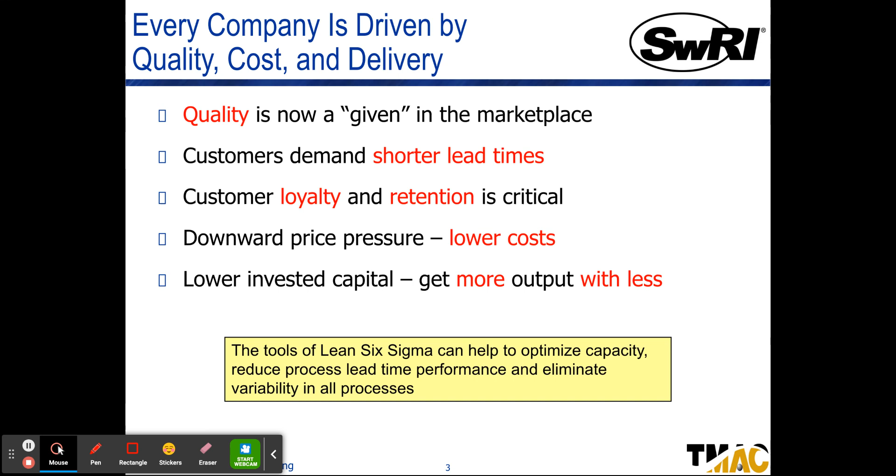Every company is driven by quality, cost, and delivery. Quality is a given in the marketplace now. If you order from Amazon, you want that item now, ASAP. Customers demand shorter lead times. Customer loyalty and retention is critical, so you want to keep your customers, otherwise they'll go somewhere else where they can get it quicker, faster, cheaper. That also talks about the price pressure of lowering costs, and then lower invested capital—you're getting more output with less. That's kind of what we're going to go through today.

What is lean? The definition of lean is a systematic approach to identifying and eliminating waste, non-value-added activities, through continuous improvement by flowing the product at the pull of the customer in pursuit of perfection. We're going to walk through that.

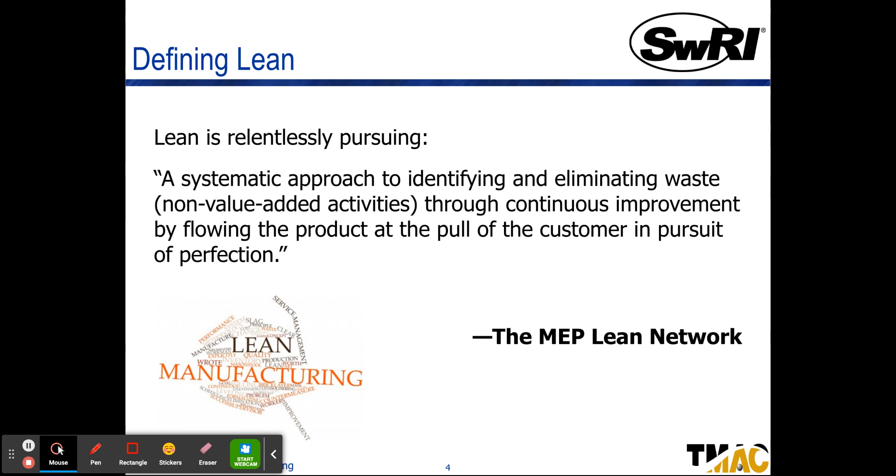So the activity that you missed today, we're just going to walk through it and talk about it since you can't do it. Basically, we are going to do a short version of what they would walk through in an orientation of a company to try and make their process more lean.

So we're going to pretend that you're hired. This is your orientation, you're getting started on your training, and we're going to be Modular Aerospace Enterprises. Welcome aboard—you are all new hires.

A little bit of background: this company was started 30 years ago by two Air Force vets. The company makes small jets and planes from modular components, where increasing customer demand is currently causing many problems. Current management is very traditional, old school in their thinking.

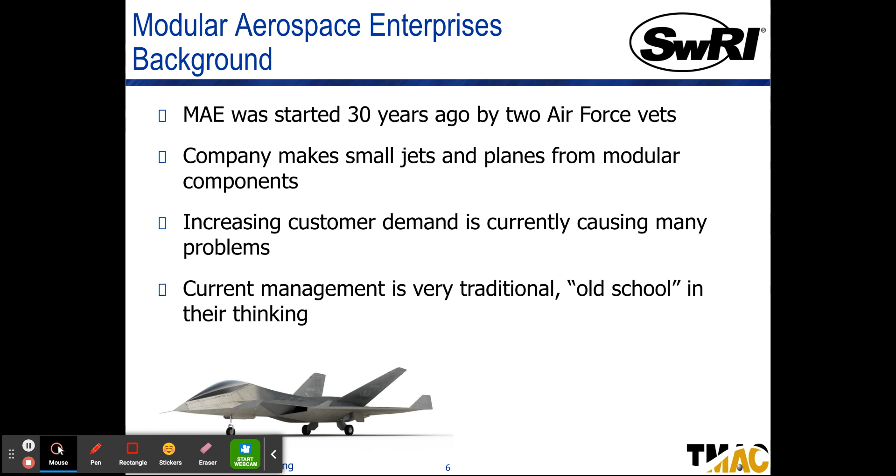All of our shifts are 7 minutes in length, and we're going to work in batches of 5 planes, so you have to have 5 planes before you can move it to the next station. You must always keep busy, but you cannot help each other, because if you help somebody at their station, you'll get behind in your own. So we want to make sure everybody stays in their own station. If for some reason you end up with a plane part and you're not sure what happened, or it's not set up the way it's supposed to be, you flip it upside down, because we're not trained to rework that. And know the boss is always right.

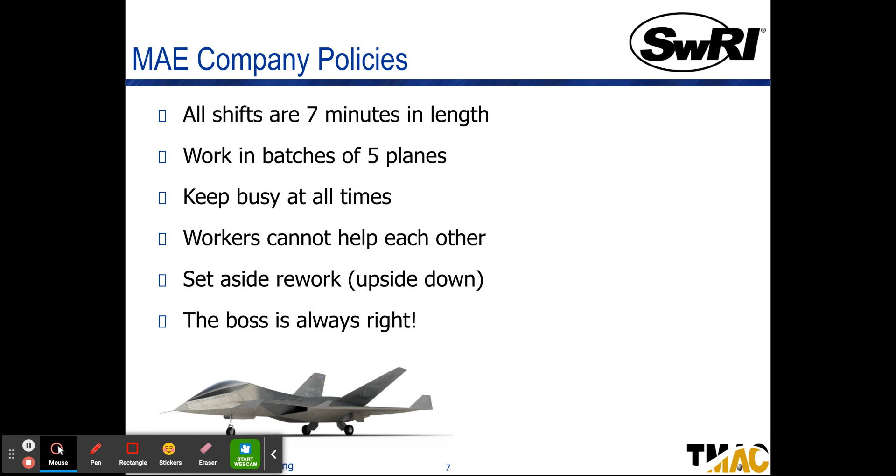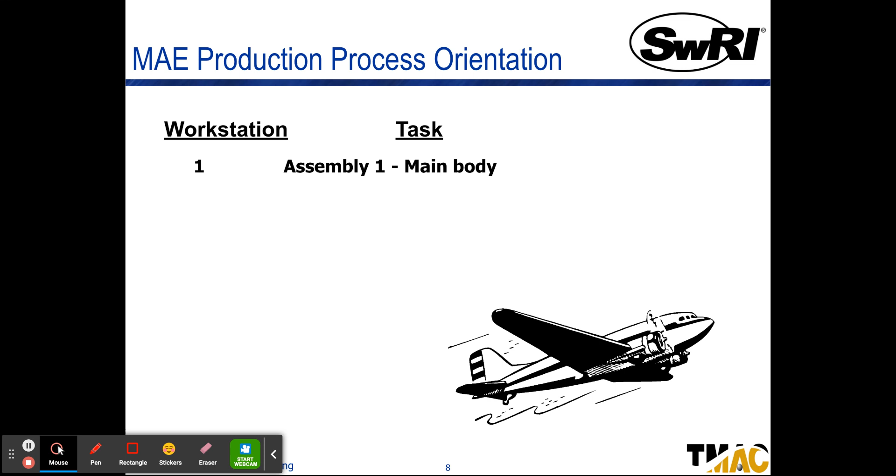In this activity, we had everybody in class work a different workstation. Station 1 was in charge of the main body of the plane. Station 2 added the wings. Station 3 added the tail. Station 4 added the cockpit and wheels. And Station 5 was our final inspection and quality control, making sure the plane was correctly put together.

We had some raw material handlers who would come from the warehouse and bring the materials you needed for your station. And then we had a plane material handler—our forklift operators—who could only bring 5 parts from each station. So when 5 main bodies were done at workstation 1, they would bring those 5 to station 2.

So round 1, we are going to do this traditional manufacturing style. Remember the rules: all shifts are 7 minutes in length, we work in batches of 5 planes, so you cannot ask your forklift driver to move your planes until you have 5. You must keep busy at all times, workers cannot help each other, and again, if something's wrong, you need to put your plane upside down because you're not qualified to fix it.

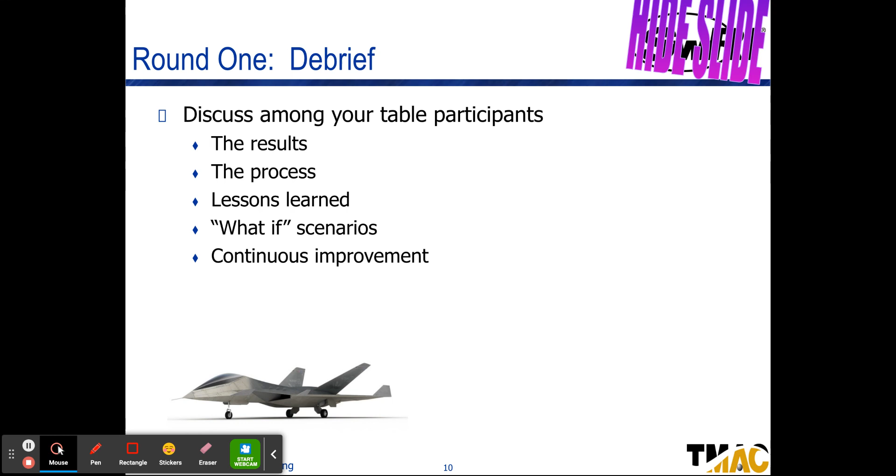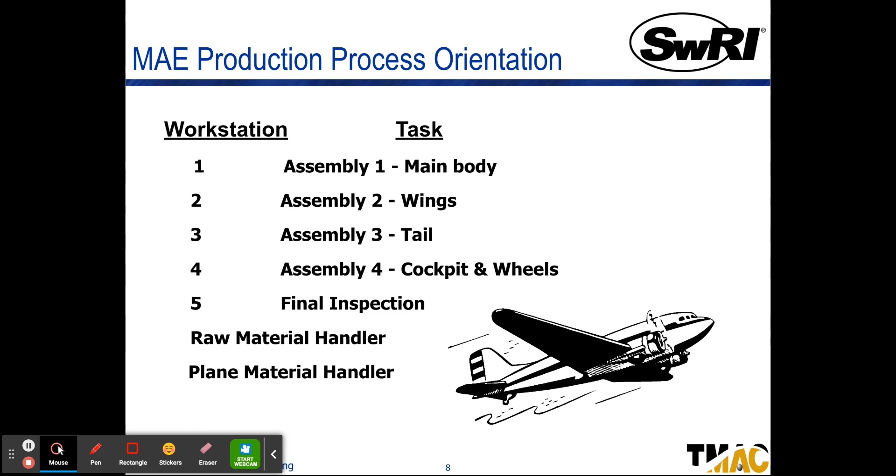When this happened, we saw a lot of lost time. So let's debrief a little bit about what happened.

So when this happened, the process just wasn't as great as we wanted it to be. The fact that we had to wait for batches of 5 took... Station 1 was pretty quick because they only had 2 pieces to put on their plane. But when it got to Station 2 and 3, there was a lot of wasted time. And so Station 4 and 5 were waiting forever to get that first batch. So batches is not really working out for us in this company.

And so we want to kind of come up with a better idea. And that's why we're hiring Southwest Research Institute to see if we can come up with a better way to do this. Our layout also wasn't fantastic.

Our layout, we had all of Station 1 in one section, all of Station 2 in another. And so we had to have the forklift driver going back and forth quite a bit. And then the materials themselves were in the warehouse, so the material handler had to go back and forth as well quite a bit. So the layout of our production line was just not very good.

And so in general, there was just way too much work that was in process. So we had a lot of work in process. And so what happened is after those 7 minutes, we did not meet our goal of 30 planes. In fact, we only really had about 5 at the end, okay? And so our customer is very upset because we did not hit those 30 planes.

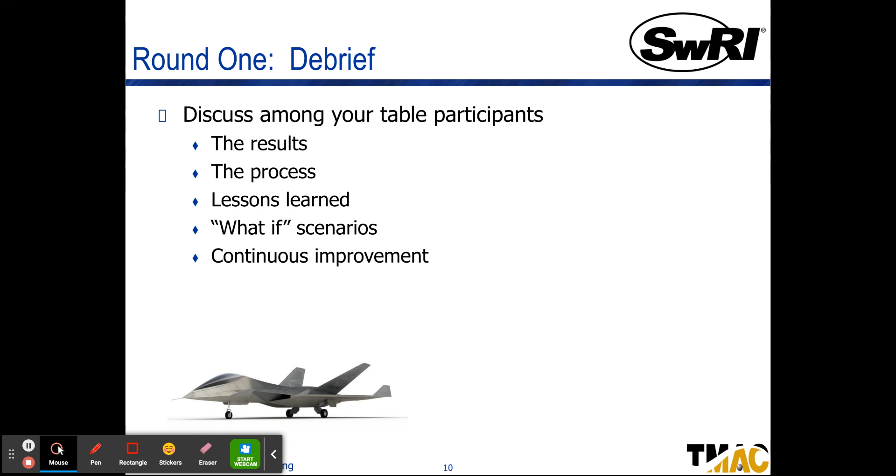So let's talk about why Southwest Research Institute can help us. So we want to have value added. These are the next steps. We want steps essential to deliver the product or service according to the customer. So the customer cares what the customer is willing to pay for, right? So if there's value being added to the plane, then of course the customer wants to pay for that.

They do not want to pay for that extra time wasted, the non-value added. So the steps that didn't generate any value from the customer's perspective, they don't want to pay for that. And so we're paying these employees extra, but there is a lot of non-value added time between transportation and materials, and this can be eliminated or reduced without impairing our process. And so we want to look at the process and see how we can better it.

So we have non-value added but necessary. There are some steps that are non-value added, but we do require them. So we need to make sure that we do have safety and regulations, and we also need to make sure we have quality control inspecting all the planes. In general, we need our non-valued items added unless a strong case can be made. Otherwise, we need to show that it is value added to our customer.

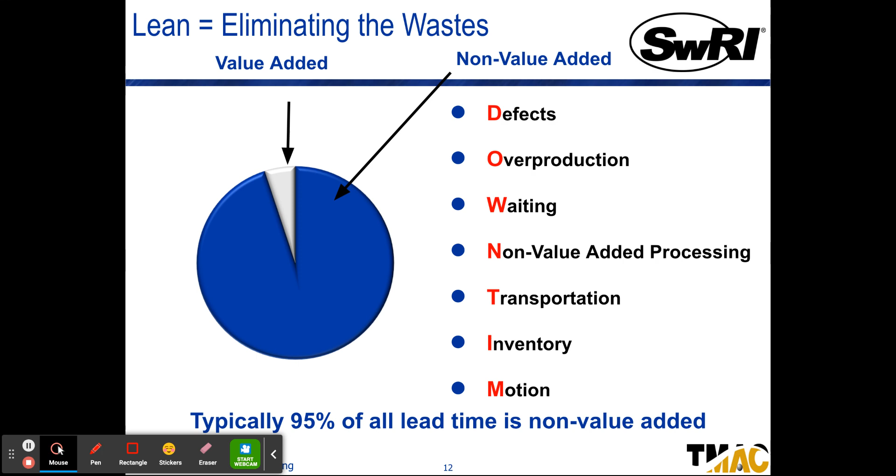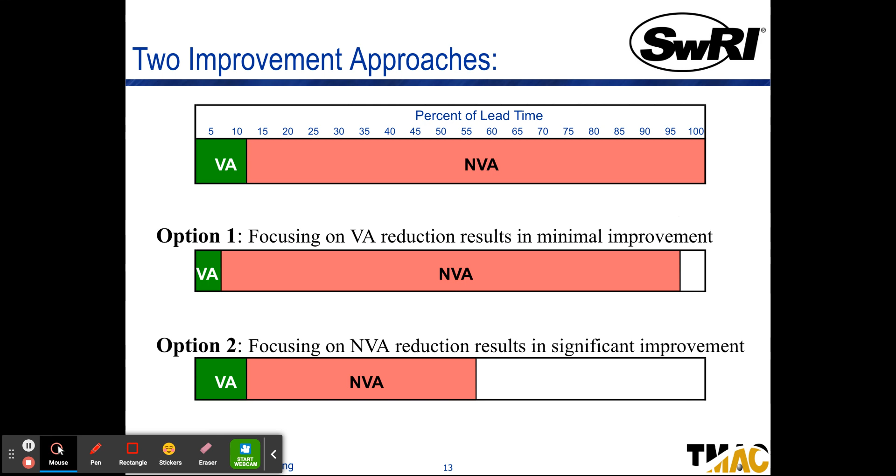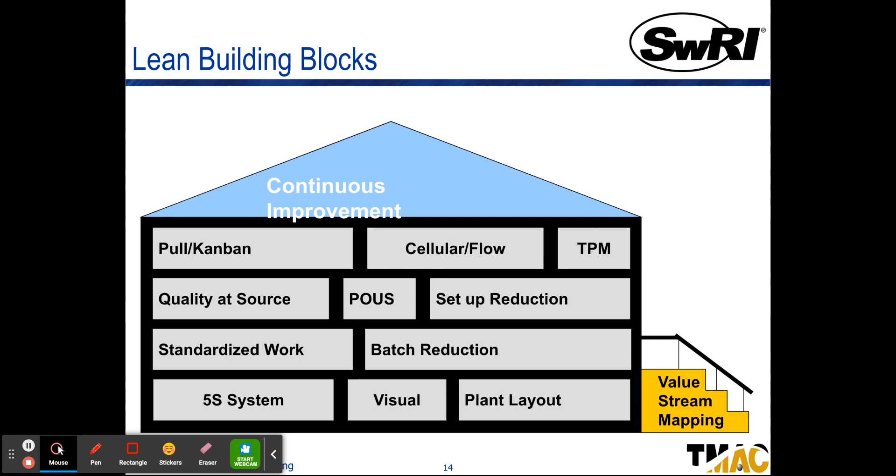Since we're in math class, let's talk a little bit about math. The customer value added time is the amount of time it's actually taking us to make the plane. When we looked at our different workstations, each station took just 1 or 2 seconds, station 2 took a little longer. But when we added all the stations together, for them to make one plane, it only took an average of about 17 seconds. So the question was, why did it take so long, almost 5 minutes, to get our first full plane out if building a plane was only 17 seconds?

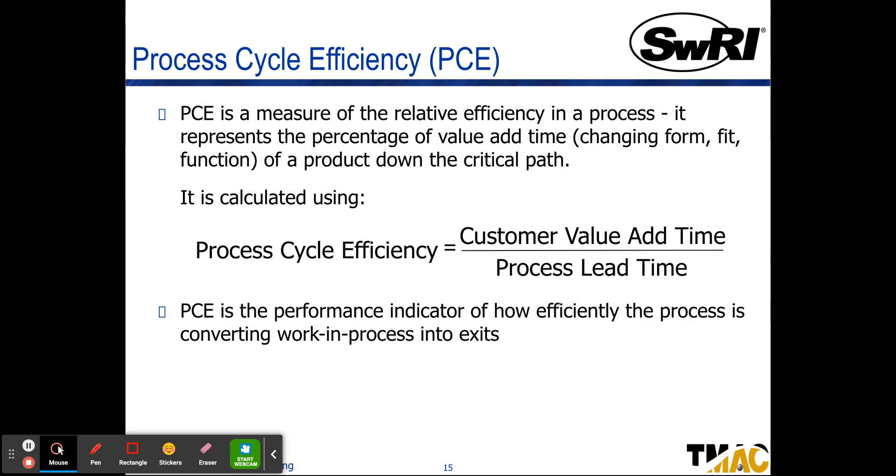So 5.6% is the process cycle efficiency. It's not very efficient in that we have all this wasted time and it took us that long to just get one plane out. The performance indicator is how efficiently the process is converting into the work in process and all the way to the exit point.

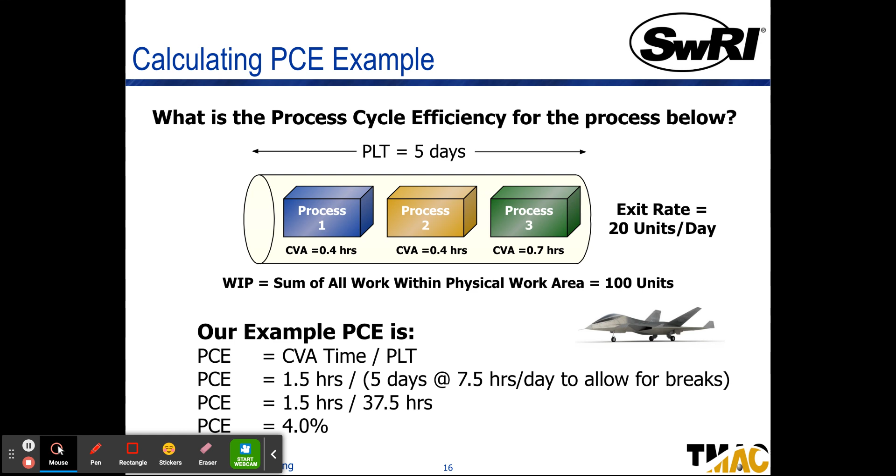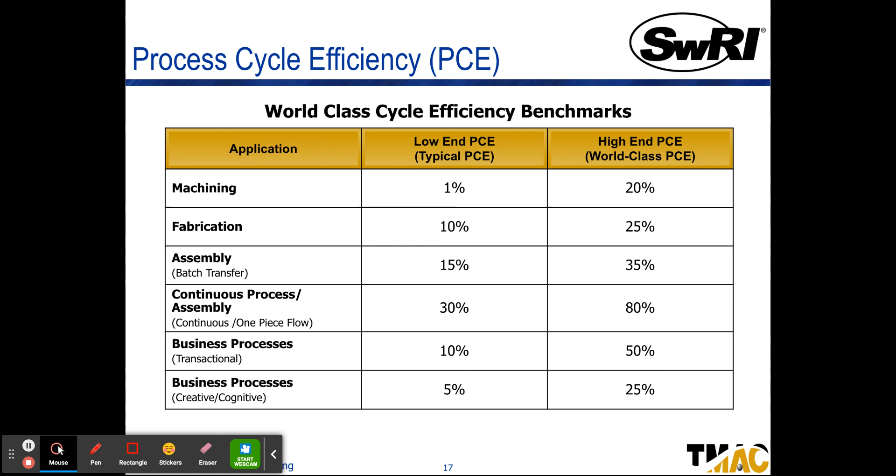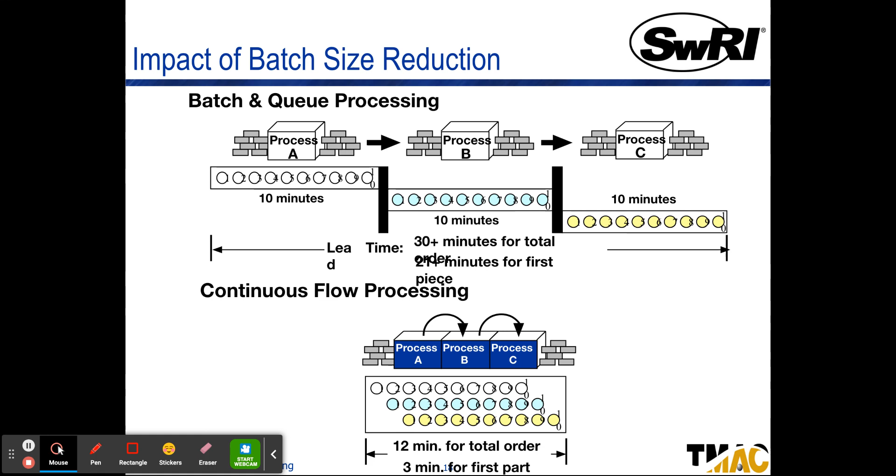For us, ours is 7 minutes — that's our work time available right now. And the demand of the customer was 30 planes. So that is the takt time, that's an equation we can come up with. Our goal is to produce that for the customer to get their demand.

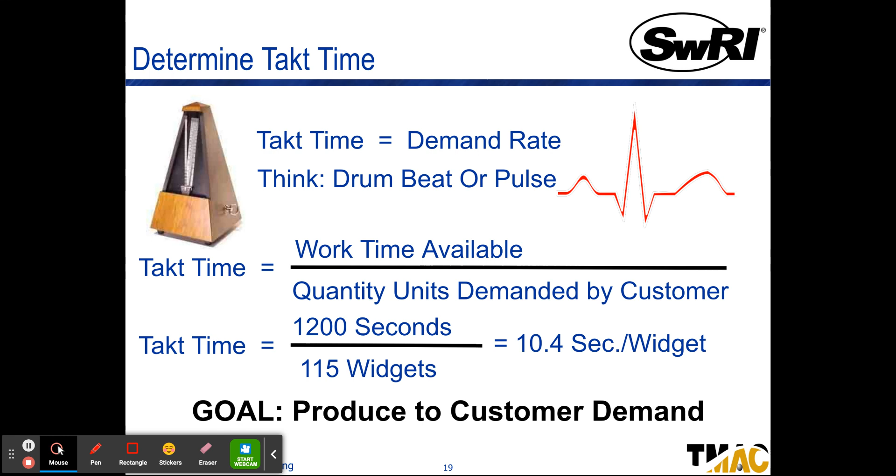7 minutes divided — we could do that in seconds if we needed to. 7 times 60 would get us our seconds. Go ahead on your piece of paper and do that: 7 times 60, that goes in the numerator, divided by the 30 planes. We should be able to produce a plane every 14 seconds. That's what you should have gotten from this, based on our experiment.

Now we need to see how many operators we really should need. If there's a cycle time versus our takt time — we said our cycle time was 17 seconds, very, very short. It said it took 17 seconds to get a plane. Maybe it was a little longer, but let's go with what y'all said. So 17 seconds to get one plane completely together, divided by our takt time, which was 14 seconds — 17 divided by 14 is 1.2.

So really, we should have only needed at max 2 operators, and instead we had lots of operators. So what is going on? We just need to make our system better.

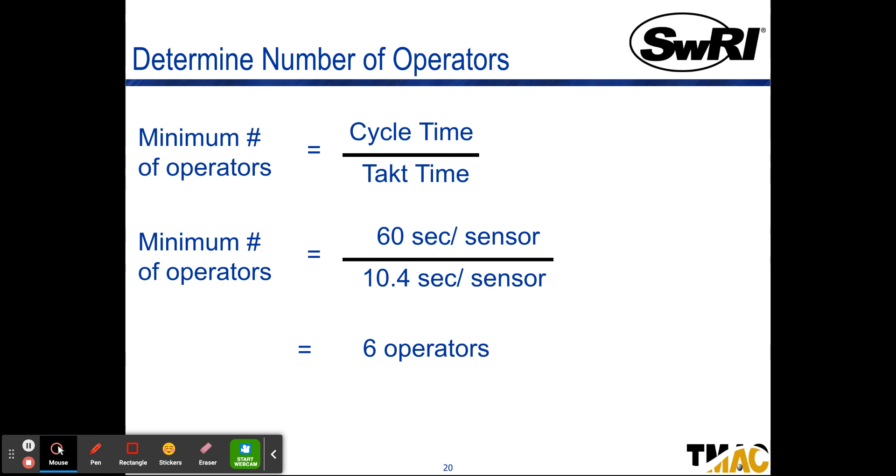Our process lead time, again, is the time from the release of the product into the process until its completion. Now, work in progress, we also want to reduce that. For the people that were here, there was a lot of work in progress, meaning they had a lot of pieces just laying around waiting to be transported to the next station. If there's ever an issue with a product, it just sits there, and that's money wasted. The exit rate was the amount of time it took to output the process.

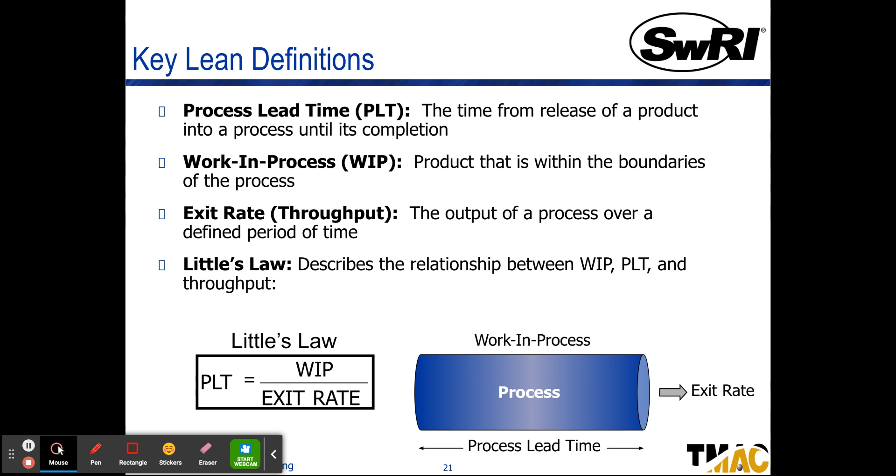Little's Law describes the relationship between these: work in progress, process lead time, and the throughput. We have this formula where we take the work in progress, called WIP, and divide it by the exit rate. Making this a lean process involves our math.

So let's go ahead and do another one. This time around, the students in class got to change what was going on and make it better. Just refreshing on what the problems were: we had this problem where we had to wait for batches of 5. Well, in this case, now let's just move it as one plane at a time. And the layout was really bad.

We had workstation 1, they were all together, workstation 2 was all together. In this case, we're going to actually have multiple stations where we can have different colored planes—maybe blue, red, white, and black planes. And so we can actually produce more if we put everybody next to each other.

Workstation 1 would hand over right away to workstation 2. There will be a queue in between every workstation, and you cannot move any more products until that queue is empty. This will help the WIP, the work in progress, so we're not leaving money or materials just lying around. We're going to have workstation 1 right next to 2, right next to 3, right next to 4, right next to 5. The process will be very simple because we will not have to transfer the planes.

We're just moving them along the assembly line. We're also going to have the materials right by them. Instead of having the materials in the warehouse, we're going to move the materials right to the stations. That will save a lot of time because we will not have materials going back and forth. So the people that were the forklift drivers and material handlers, they're not out of a job—we're just going to move them to the other assembly line.

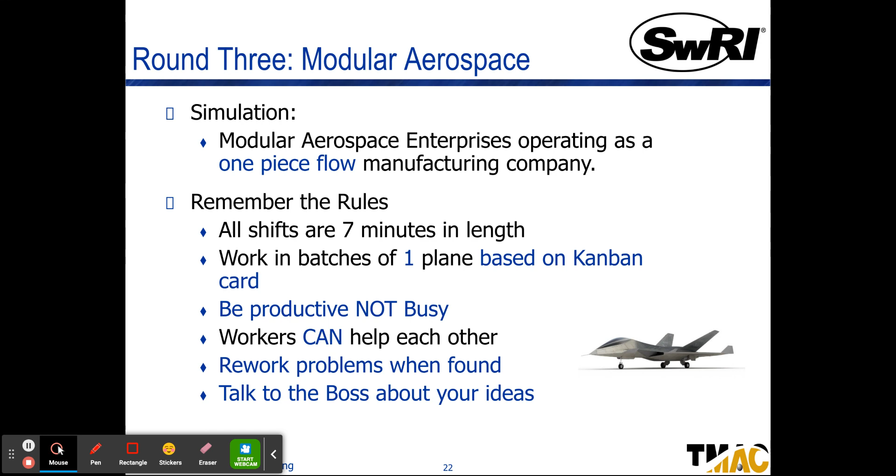In class, they did this, and it was really beneficial. In fact, the majority of the people got over their 30 planes. Our highest assembly line in 7 minutes was able to produce 38 planes. That is now way better because we met the customer's demand and we were able to create different planes while at it.

Southwest Research Institute helps these companies try to figure out a way to become faster and more efficient for their customers. Because again, if we want our Amazon order ASAP, people also want their planes ASAP.

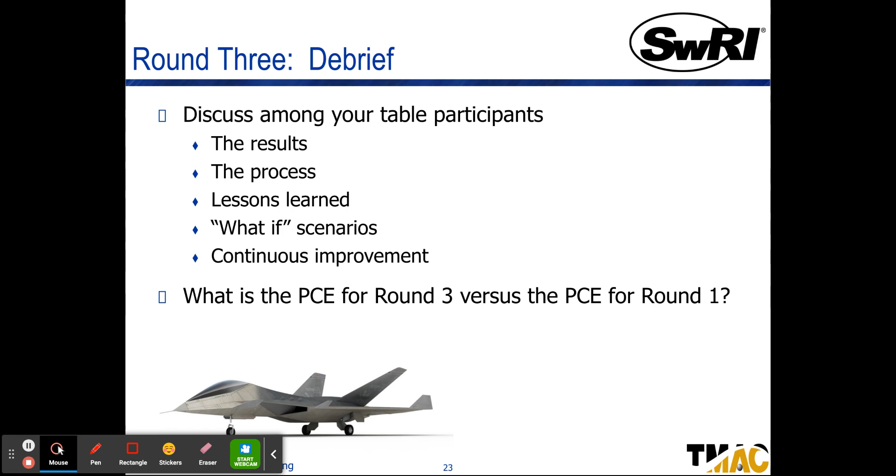And then a fun Thomas Edison quote: 'I have not failed. I've just found 10,000 ways that won't work.' And so with that, thank you, and we'll talk to you soon.